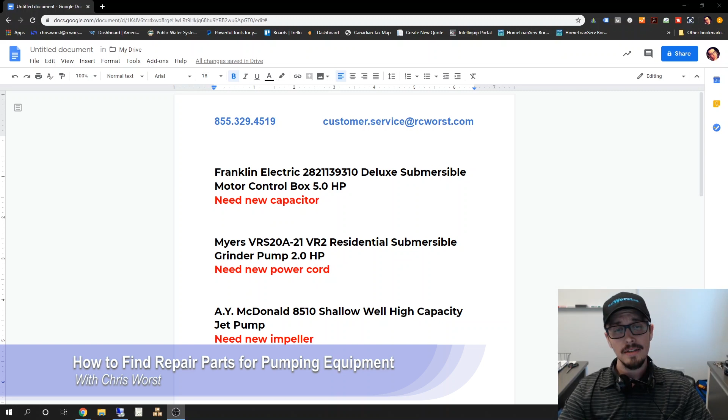This is Chris, and today's video is all about finding replacement or repair parts for your pumps, control boxes, etc. Hopefully this video will help you figure out what parts you need. Oftentimes you're taking something apart because it's not working, troubleshooting, and you figure out you need a replacement part, but maybe you don't know what that part is called or what the part number is so you can order one. I wanted to show you how I go about figuring out part numbers and what to call them, which might be useful for you folks at home too. So let's dive right into it.

I've got three items here: a Franklin Electric control box, a Myers grinder pump, and an AY McDonald jet pump. We're going to be looking for a new capacitor, a new power cord, and a new impeller. Let's jump into things.

The first thing we're going to do is figure out what our model number is on the piece of equipment, so we can figure out the part numbers for the parts we want to order. In this case, our model number is 282.11.3.93.10.

If you're like most people, you'll take that model number or what information you know about it, go to Google, punch that in, and away you go. If you're lucky, you'll land at our website like we have here, rcworst.com. But I recommend, if it's something we carry and sell, just go directly to our website and punch in the model number to find it that way.

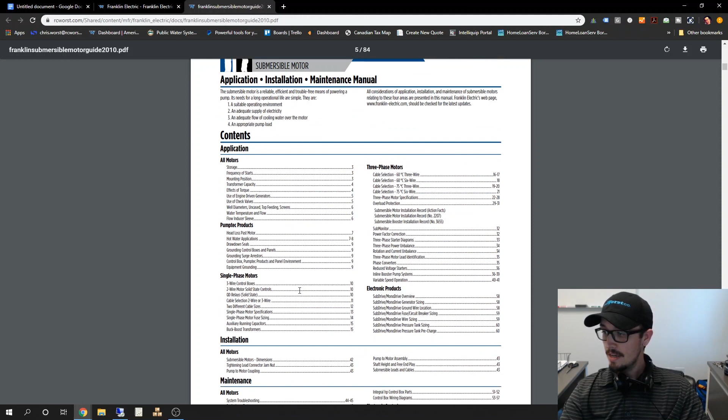Let's see here... Control box parts, pages 51 to 52. Hey, that's just what we're looking for. Let's skedaddle on down there to 51 and 52. I think we passed it just a pinch. Hey, we're starting to get into the right territory here.

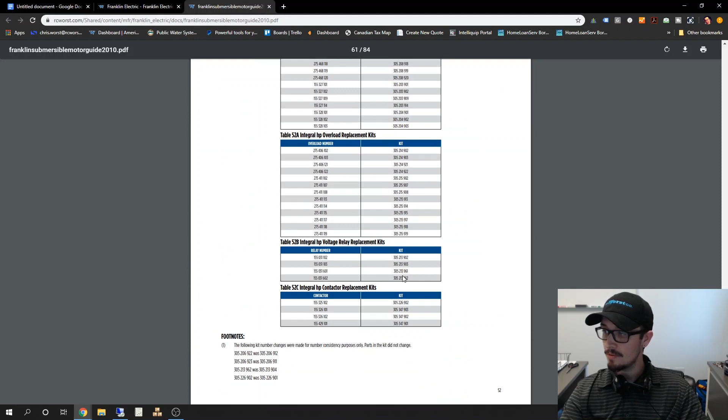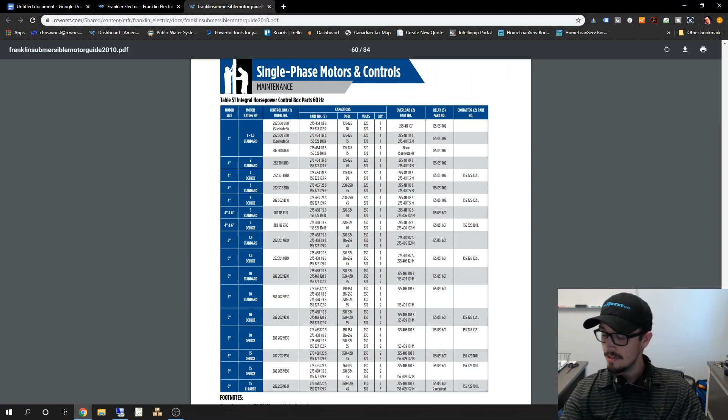So we've got capacitor replacement kits and overload kits. We only need one capacitor, so I don't want a kit. Let's zoom in here. We've got a 5 horsepower, 282.113.93.10. So in our AIM manual, we go down to this 5 horsepower, and we're going to realize that that number matches up.

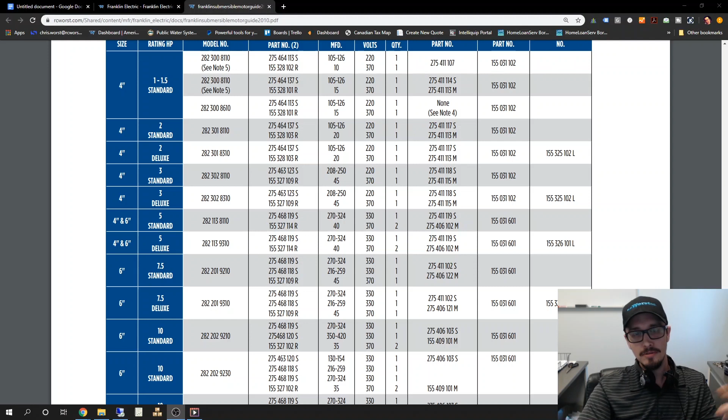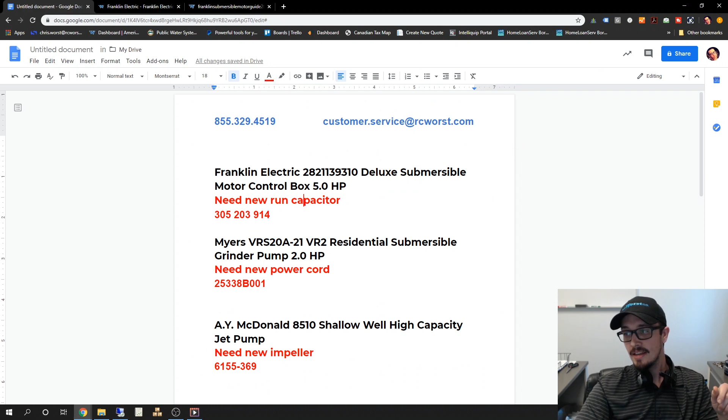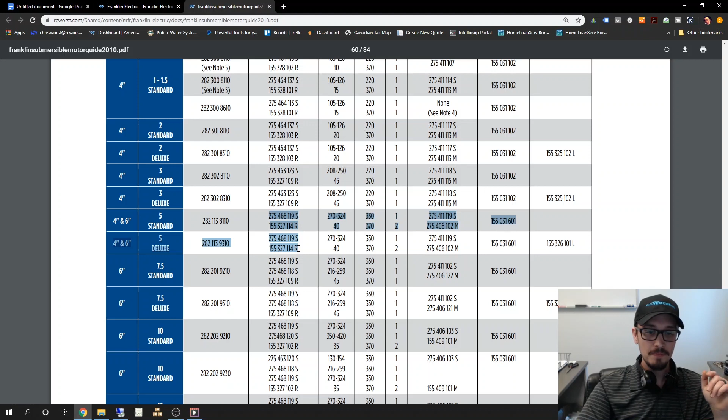Okay, hold on. I just realized after watching that video that I just made, that you're now watching -- videoception -- that in the process of picking the parts here, I kept wanting to look at this 8110. Clearly on my document I've got the 9310. I goofed up, but the great thing is they do use the same capacitors, so that's no excuse. But anyway, I just got a little mixed up when I was recording that video. Now back to the video.

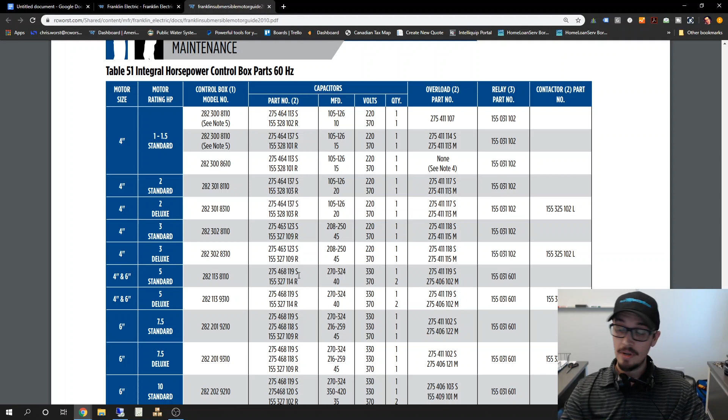So what we look at here is capacitor information. It's going to list the start and the run capacitor, and you're like, wait, hold on, I don't know which capacitor it is that I need. Well, there's two ways you can go about that. You can either pull the capacitor out and, hopefully, the numbers on it are still readable, and match that up with the information here to determine whether you need the start or run capacitor. The other way to go about that, and I already flew by it, but we'll cruise down here -- just showing you there's multiple ways to figure this stuff out.

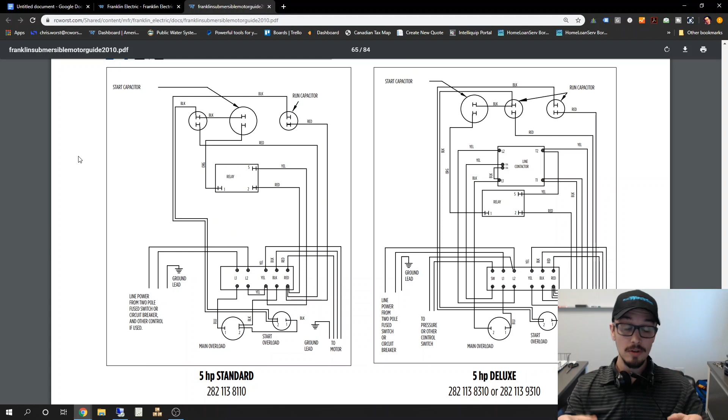So we go down to our 5 horsepower box, and it's the standard, the 8110. Look at this, we've got a run capacitor and a start capacitor identified on this wiring diagram. So if you had opened up your control box and said, oh hey, it's the one on the right, then you know that you need the run capacitor. That's just one example of a way you could figure out what part you need, by looking at the diagrams that are provided, and we'll get into that on some of the other stuff. It's going to have some better diagrams.

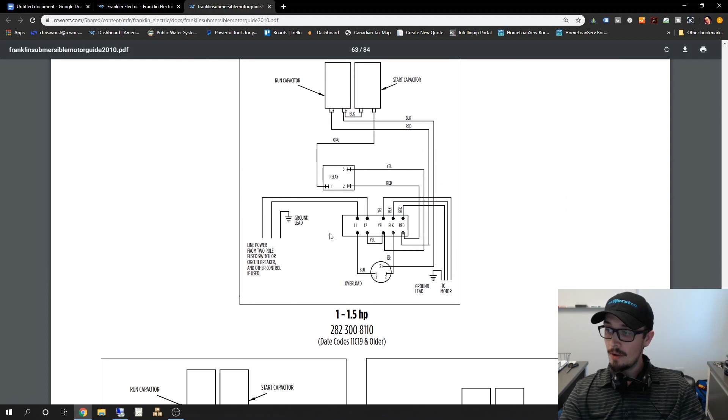So now we know, okay, we need a run capacitor. New run capacitor is what we're going to go with here. It's a little interesting how Franklin goes about this because what we're going to do, so we've got our 5 horsepower, we want the run, and that's what this R here means. We're going to take this and just control F, and hopefully we can find that again.

And here we go, Integral replacement kits. So this must be the one that we need. There's an interesting thing that happens here where with Franklin Electric, this part number is actually the part number on the capacitor in a lot of cases. But in Franklin Electric land, this is the part number that they use to order it. I know, it's a little confusing. Lesson learned over a long time.

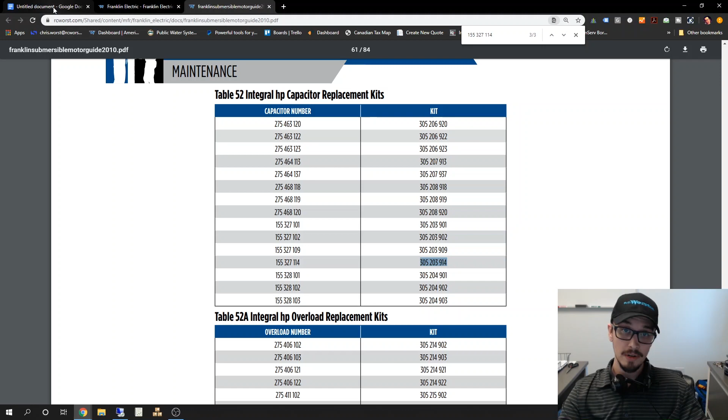So we've got this, the true part number that we're going to use for that component. So that quick, now we know that's what we need. All right, so we've clearly figured that out, and where this would be really handy is if you don't know what the heck you're looking at. So you look at the parts diagram, the parts breakdown, and go, oh, that's what that thing's called. All right, so first one done.

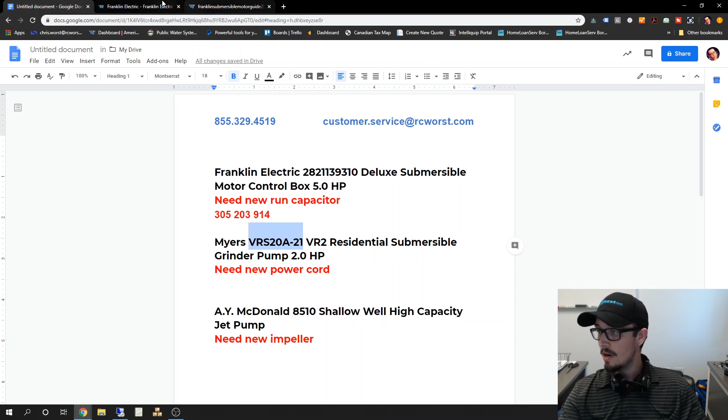Let's go ahead and check out our VRS20A-21. I'm just going to copy that because I like to cheat. Close this, go to the RC Worst website, hit search. Hey, there's our product right there. That looks a whole lot like my pump. Resources again, now we've got an installation, specifications, brochure.

9 times out of 10, you want that installation manual. So keep your installation manuals, as I've mentioned probably 50 times. Don't throw them away, because as pumps age or they no longer get produced, those owner's manuals get harder and harder to come by. But oftentimes manufacturers will continue to make parts, or the part is interchangeable with something they're already using, so it's still around.

You just got to have the part number. And I've had situations where I've called the manufacturer and they don't even have the manuals available themselves. So if you maybe have the part number, you might get lucky. Not always, but sometimes, and if you can get lucky sometimes, you save yourself some money.

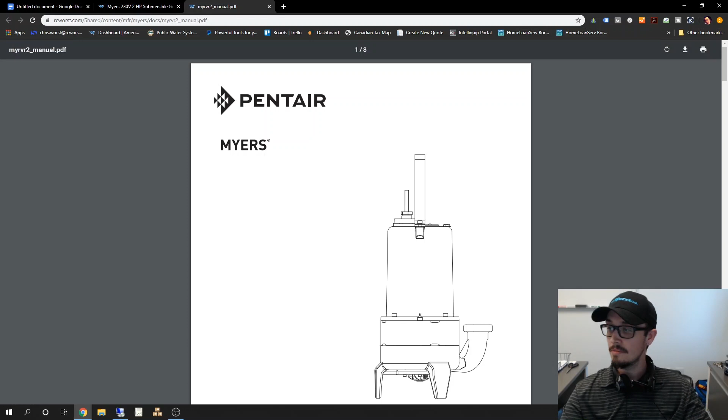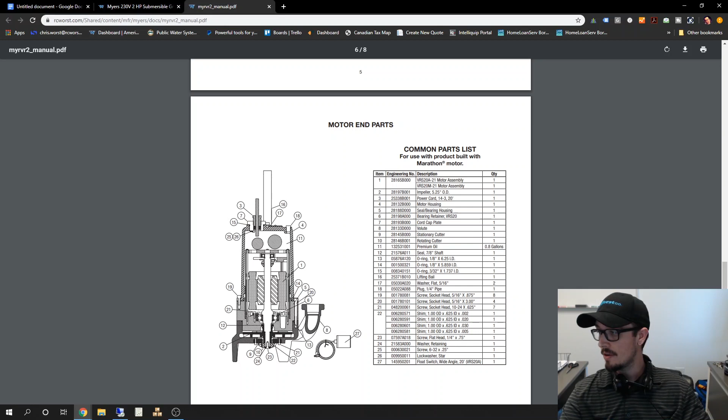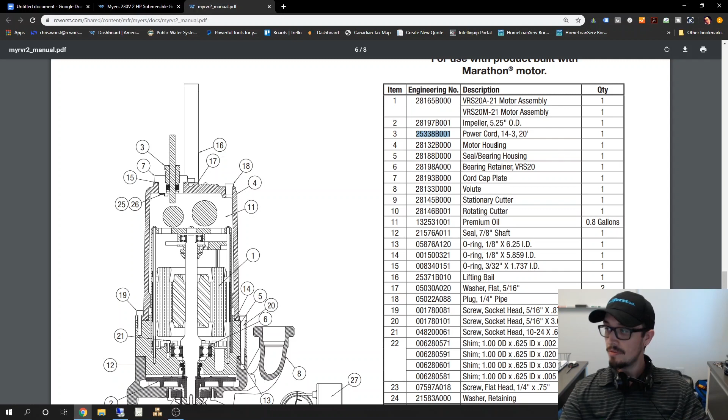That definitely adds up. So we're scrolling through this owner's manual here, and what we're looking for is a parts breakdown. Great, here we go, we found one. Now in this situation, remember we needed the power cord. And they make it so simple and so easy for you in that owner's manual. Part number 3, so we figure out where 3 is on the list, and boom, power cord, size 14-3, and it's a 20 footer. Hey, that's exactly what I need.

Alright, so now we've got our part number. Let's put that down here. Ooh, we got to make it big and red like the rest of the stuff or it would look weird. So let's do it. Alright, oh, it's not bold. OCD, go away, you're killing me.

There we go. Okay, so the last thing that we're going to find is an AY McDonald 8510, yada yada yada, jet pump, new impeller. So this one's a little bit trickier, just to get you thinking outside the box of different ways that you can look for this information. So let's just start by pulling this up on RC Worst's website.

Put it in the search bar, pop it up. We got 2 options that match our search here. So we got a high capacity, high pressure. Well, I seem to recall we needed the high capacity impeller.

So let's figure out resources. Hey, there's no owner's manual for this guy. What gives? Well, sometimes you got to dig a little bit deeper. So let's do that. We're going to go to aymcdonald.com, take it to the source, right to the manufacturer. And man, that's a cool image. I could watch that for a long time, but I won't.

Let's go to support, just because I happen to know where to go, and resources, because we need documentation. Typically when you're looking through manufacturers' stuff, they always call documentation resources, so remember that.

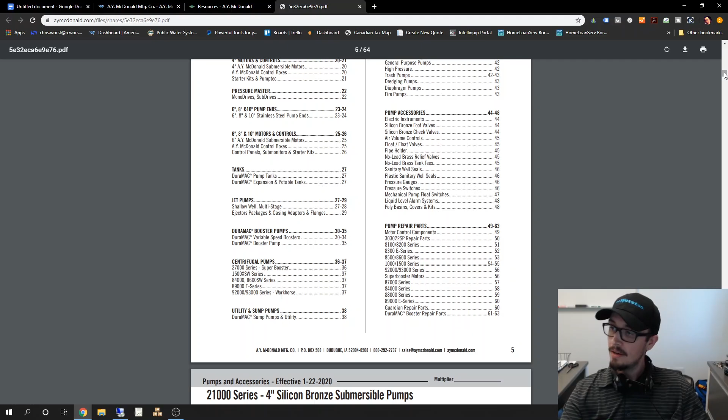We're looking for an index, so you're going to give me an index. Okay, hey, that is the magic words right there. Pump repair parts, and our 8500 series is page 54. No, wait, 53. Okay, well, let's right on down there.

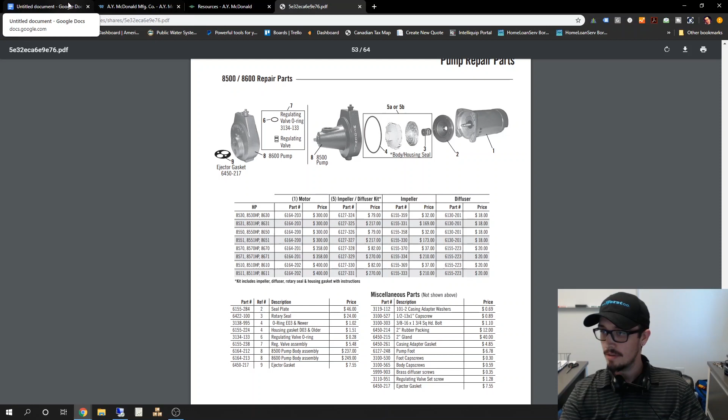53. Almost, come on, a little bit farther. Giving the scroll wheel a workout today. All right, so 5300, sir. 5500, right? Yeah, okay, I'm getting confused. Yeah, 8510, here we are.

So zoom this guy in. Zoom. Okay, so the 8510. Let's find it, let's find it. Oh, here it is. Okay, and once again, we've got a nice breakdown here.

So you're like, this white thing, I don't know what it is. Well, it's your diffuser. Now you know what to call it. Well, they don't really call it out very well here, but at least you know what you need to order. So in this situation, they've got an impeller, a new diffuser, a new body O-ring, as well as a replacement seal.

And it looks like you can order a whole kit, so you've got an impeller diffuser kit, but they also make it easy and break it down. Do you want just the impeller, just the diffuser? The one thing I would say about this is they should highlight what each of those is so that somebody who maybe doesn't know what they're looking at knows to buy the part that's broken.

Obviously, you're holding it in your hand, you know what it looks like, but you don't know what it's called, and that's sometimes the problem. And then you just send us a picture or whatever, and we can figure it out. But anyways, so we just need the impeller. Well, now we've got our part number for our appropriate impeller.

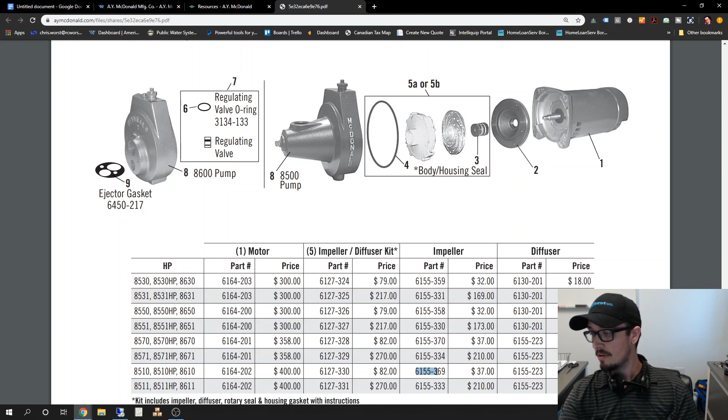And thus it's going to do it to me again. I knew it would, look at that. Okay, size 18, oh bold. And we got to go up. There we go, nice and beautiful.

So, that quick, we found the part numbers for the parts that we needed to replace today. All that's left is to get a quote from RC Worst to go ahead and get those parts ordered for you, assuming that the parts don't cost more than the new pump, which sometimes is the case.